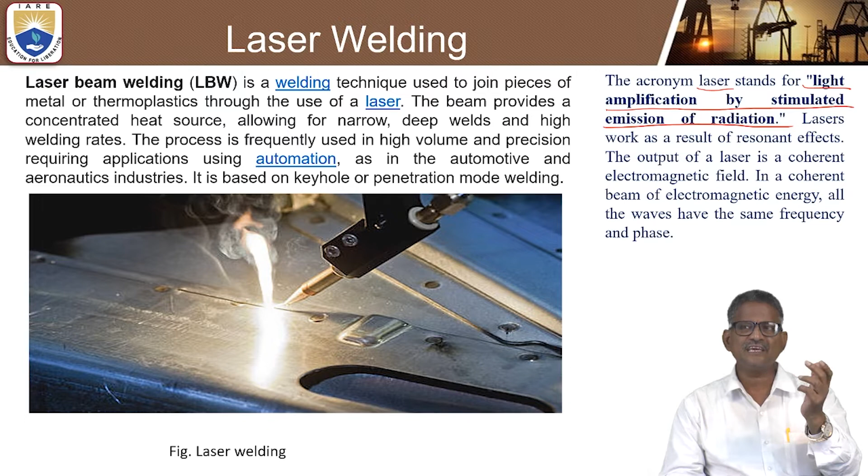You can clearly understand the diagrammatic representation. As you know, the acronym laser stands for light amplification by stimulated emission of radiation. But generally lasers work as a result of resonant effects.

The main output of this laser is a coherent beam of electromagnetic energy. All the waves have the same frequency and phase. So laser beam welding is also similar to electron beam welding. Only thing is the effect of this light amplification by stimulated emission of radiation will act effectively. So here the laser beam is one of the main criteria, how the laser beam will act on this. You can see it clearly.

Laser beam welding is a welding technique used to join 2 pieces of metal or thermoplastics. In general, some thermoplastics and thermosetting plastics are also widely joined with laser welding. Here this laser beam provides a concentrated heat source, allowing for narrow or deep welds and high welding rates.

So the process is frequently used in high volume and precision requiring applications using automation. The majority of automated applications, especially in automotive and aeronautical industries, widely use laser welding, and keyhole or penetration mode welding can be done by this laser welding process. Now we will discuss one by one the operation of laser welding and the principle behind it in detail.

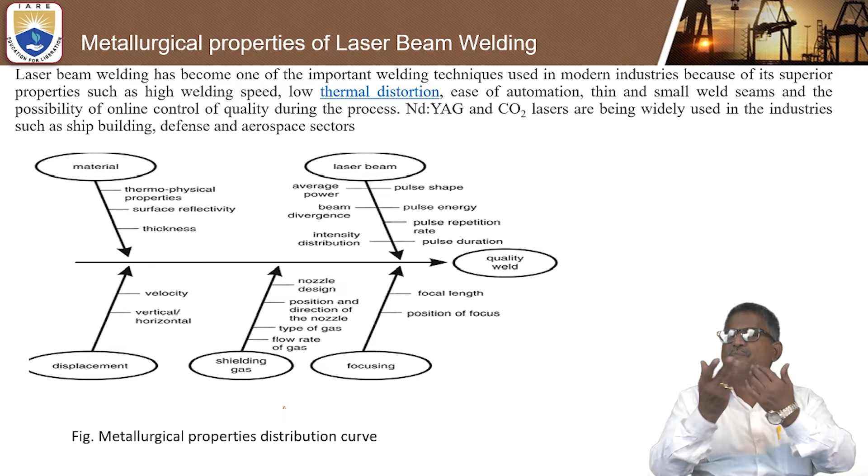Ishikawa diagram, or vital few trivial many. It is a cause and effect diagram. So this cause and effect diagram is the most widely used in the metallurgical properties distribution curve. In this case the first and foremost point is the material, how we can control the material. These are the material causes: thickness, surface reflectivity, and thermophysical properties are among the most interesting, to improve the material properties effectively.

And laser beam, where you can see the pulse shape and energy, pulse repetition rate and pulse duration. All these are very interesting. All these, the elliptical shape, material, displacement, shielding gas, focusing lens, laser beam, and quality weld. Finally, to achieve good quality weld, you should follow the causes and remedies of this Ishikawa diagram or fishbone diagram.

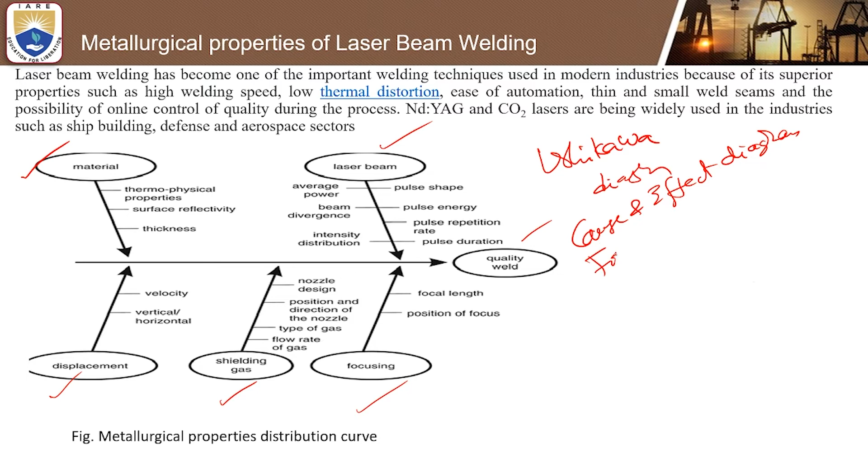This is also called the fishbone diagram. What are the various causes which influence the material? First is thermophysical properties, surface reflectivity, and thickness. These three are very important, so that they can improve the material properties. And laser beam, mainly average power, beam divergence, intensity distribution, pulse shape, pulse energy and pulse repetition. Pulse duration is one of the most widely used in this laser beam.

In order to operate with a good beam, we should use all of pulse shape, energy, repetition and duration. Coming to the other side, average power, beam divergence, and intensity distribution are also very important. And shielding gas: there are various causes which influence the shielding gas, mainly nozzle design, position and direction of the nozzle, the type of gas and the flow rate of the gas, so that the shielding gas can be adjusted effectively.

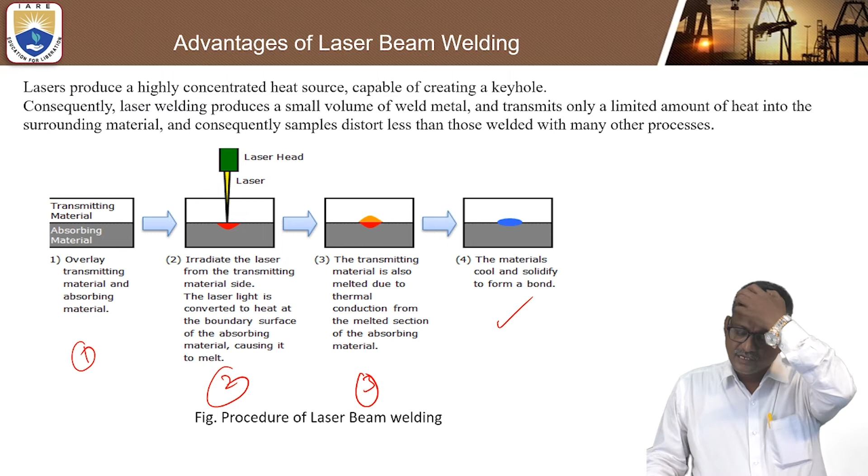melt. The third important point is the transmitting material is also melted due to thermal conduction from the melted absorbing material. And last but not least, the materials cool and solidify to form a bond. So you should cool and solidify the bond so that it forms effectively. This is an interesting one.

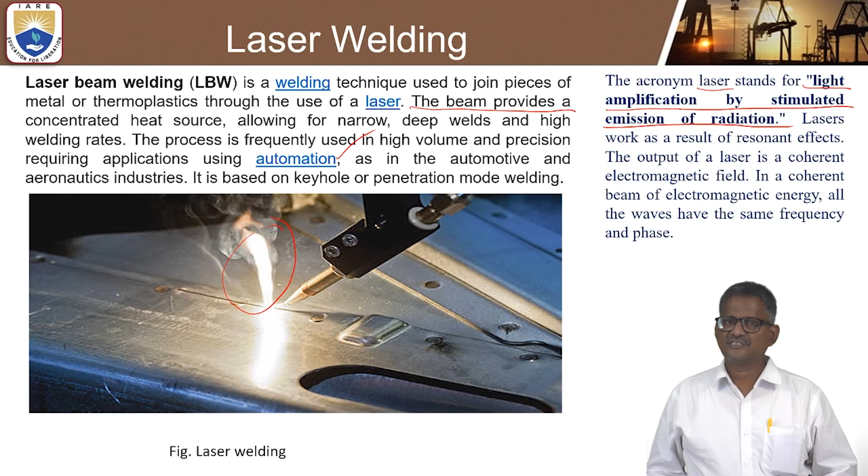Okay, this is about the laser beam welding process. Students are supposed to understand clearly the usage of laser beam welding. That is, light amplification by stimulated emission of radiation. Now this is the operation of laser beam welding. And this is another principle: speed is directly proportional to the power intensity.

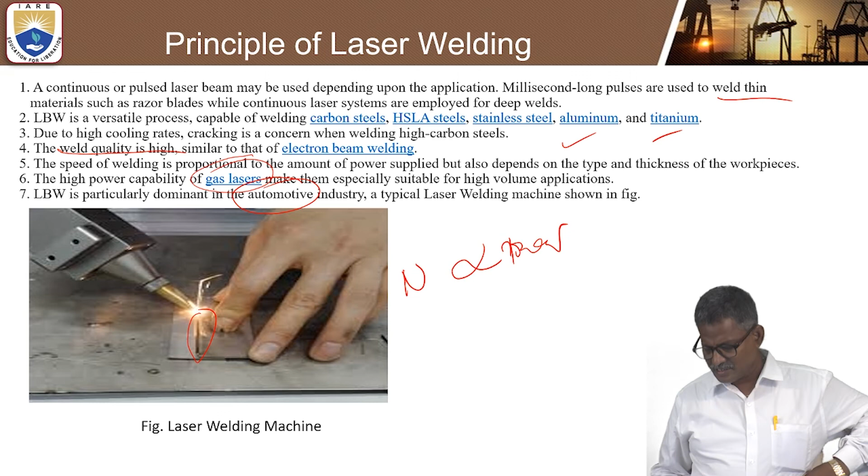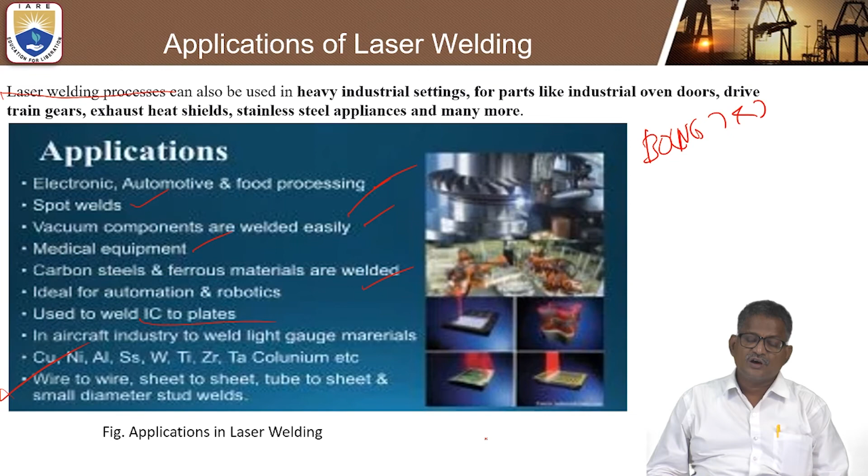Coming to the applications: electronic, automobile, food processing industry, and vacuum components are welded very easily. Medical equipment and carbon steel, mostly ferrous metals, can be used, and you can weld ICs to plates. Also copper, nickel, aluminum, stainless steel, titanium, zirconium, tantalum, etc. Sheet to sheet, tube to sheet, and small diameter stud welds. So this is the application of welding.

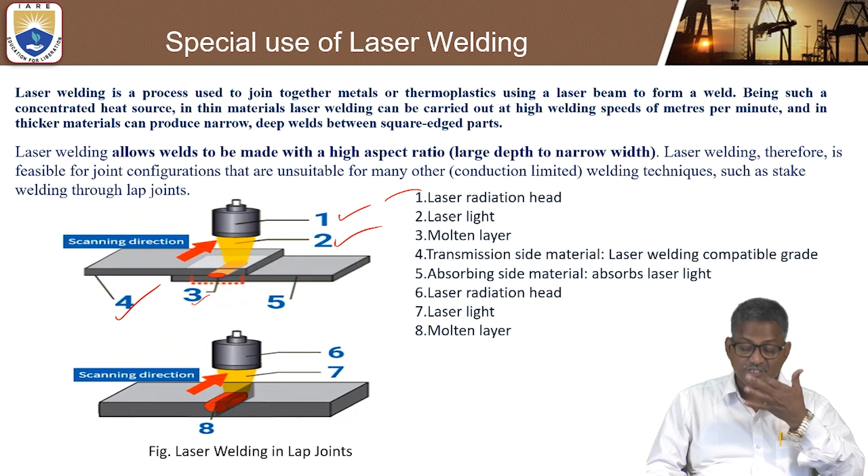Coming to laser welding in lap joints, the numbers stand for the laser radiation head, laser light, the molten layer, which is the third important part, and laser welding compatible grade. The absorbing side material absorbs the laser light. So you use the radiation head, the laser, and there is a molten layer.

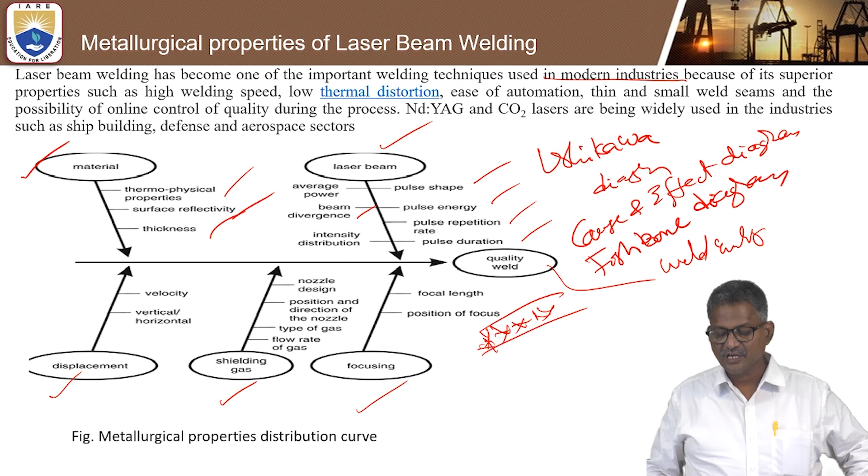This is the cause and effect diagram for metallurgical properties. Based on the cause, the effect will be identified. For example, the material must have a proper thickness, otherwise you can reduce the thickness; surface reflectivity and thermophysical properties, laser beam and focusing, shielding gas, nozzle design, and gas flow rate can be suitably understood. And finally, weld quality is very smooth.